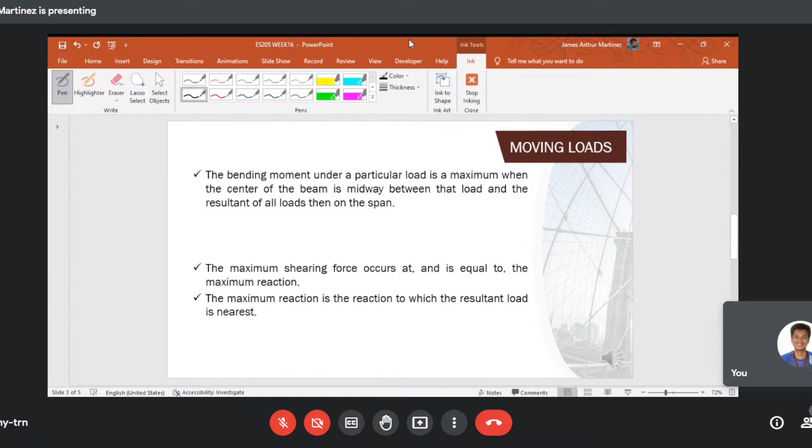Ayun. Hala, hindi ko sure. Okay, very good. So, by the way, class,

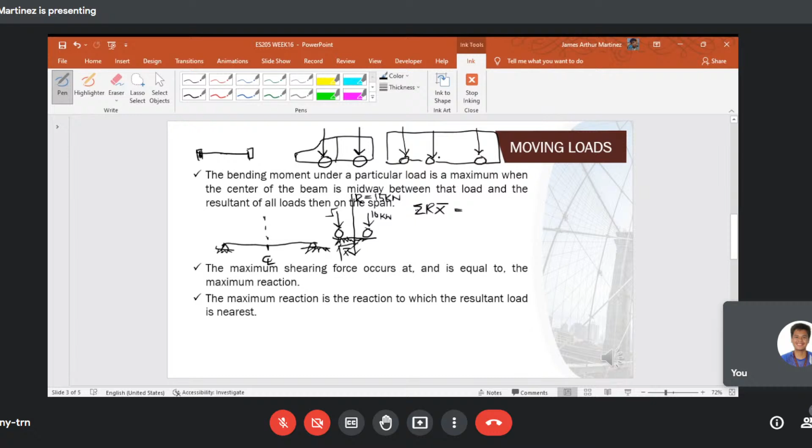So, pag-locate mo sa imuhang resultant force, so we are to apply the Varignon's theorem, di ba? So, from statics. So, ang atong baseline ani is si 5 kilonewton na force. So, what will happen is, di ba, you have the summation of resultant force x bar is equal to the summation of its components na dayon. Let's say P1 x1 plus P2 x2 etc.

So if i-apply nato na siya dinhi, so resultant force nato which is 15 kilonewton x bar is equal to, so kung ang 5 kilonewton ang base, so moment arm or the distance lang niya ana is 0. So, the 10 kilonewton, you have 10 times the distance, L. Let's say this is length L na distance. So, 10L. Therefore, ang location sa imuhang resultant force is 10L over 15, or that is 2/3 of L, 2/3 of the distance of your concentrated loads, 5 kilonewton and 10 kilonewton.

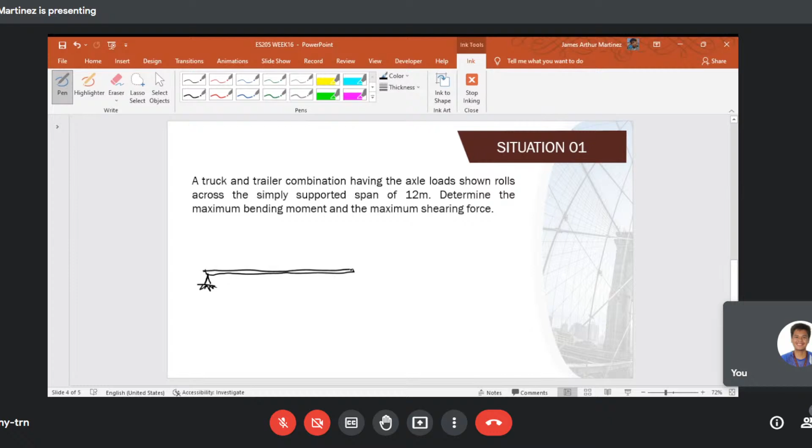So we have here a truck and a trailer combination. Sige, wait lang ha, wala kay ruler. Okay, so let's say muning span sa to and it is katong beam, no, and it is simply supported. So span niya is 12 meters, no? Sige, so ilocate na to yung center line. Let's say naa ta'y part or naa ta'y point. And then naa ta'y mga truck o trailer nga combination. Wala ko i-state, actually naa tay figure ani class, and I forgot to include it here. But ako na lang i-draw ang figure.

So ato ang moving loads, kay naa siya. So we have here natay tulo ka axle, no, so these are axles, class, represented by wheels lang, and naa silay magnitude of 15 kilonewton, 25 kilonewton, and 50 kilonewton.

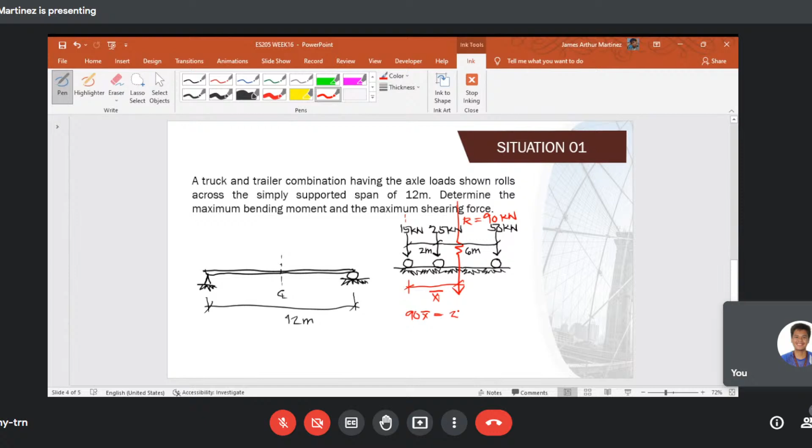So kung ato ang baseline or ato ang analysis is ato i-consider na point si 15 kilonewton na force, so you have 25 times 2 plus the 50, no, 50 kilonewton times moment arm is 6 plus 2, so 8. So x bar therefore is pila ba ni siya? This is 5 meters, no?

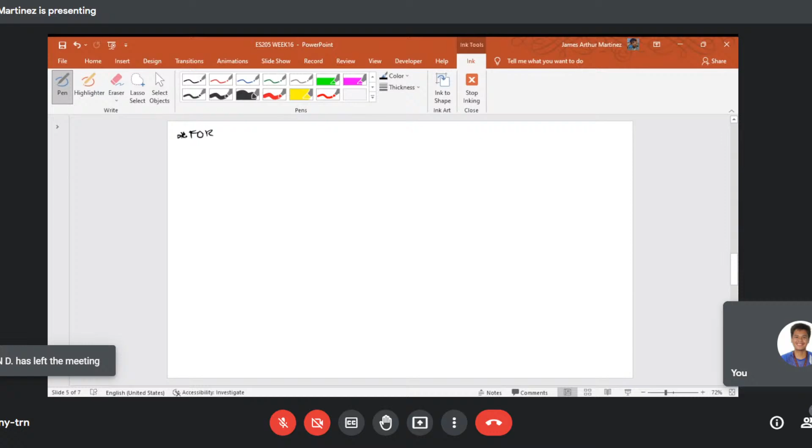Sige, so for... so we are finding for, or we are determining the maximum bending moment pa, class, no? Later ang shear force na pod. So for 25 kilonewton na load, sige, sa itong buhaton, di makapy ba ni, para di na ako magsige drawing ng beam.

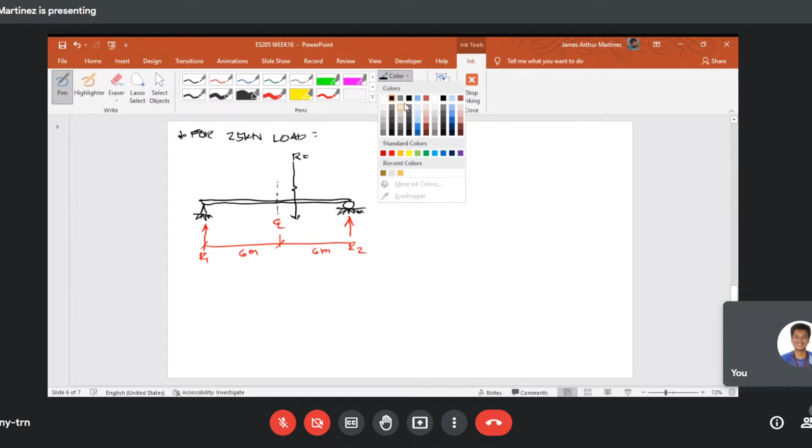So you have here the resultant force, CR, which is equal to, pila na siya? 1.5, no? And then C, 25 kilonewton. This is also 1.5 meters. Okay. Sige, so location sa to ang 15 kilonewton is 2 meters from 25 kilonewtons man daw siya, no? And this is 6 meters.

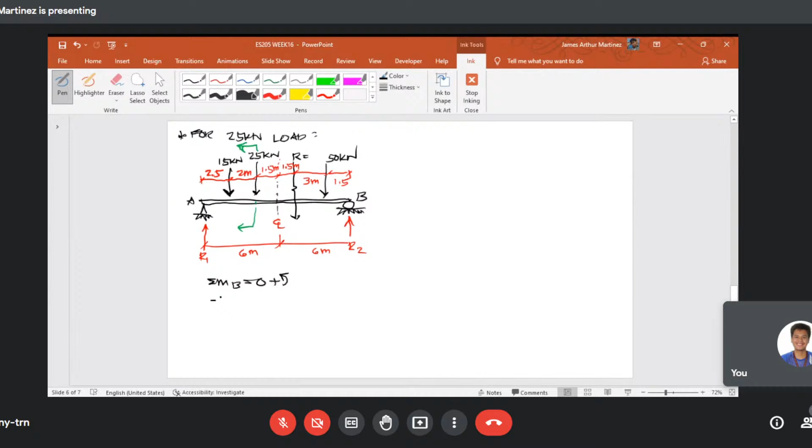So by summing up moment at point B, makuha na to ang reaction kang point A. So summation of moment at point B equal to 0, having counterclockwise as positive. So you have, the same lang no, negative R1 times moment arm is 12. Then, okay, so si resultant force na ang ako i-consider lang yapon diri no. So that is positive sign convention no, 90, since the resultant force here is 90 kilonewton as well.

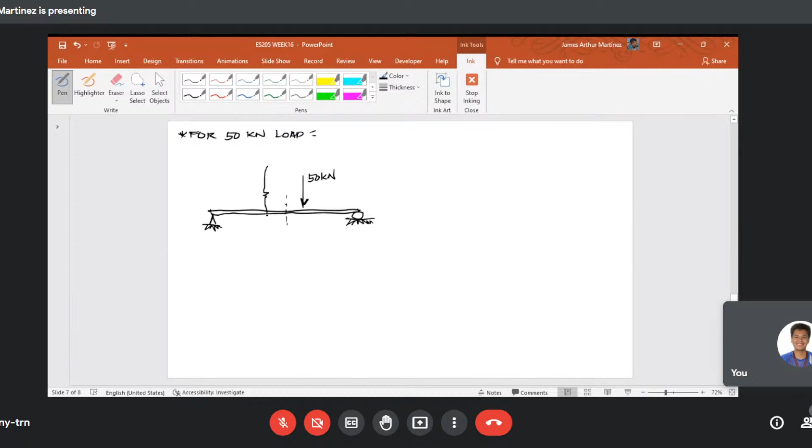So for 50 kilonewton load, patungaan nato ang center line sa ato ang bridge, ato ang simply supported nga bridge. Sige, so 50 kilonewton and 90 kilonewton, or ato ang resultant force, that is 3 meters. So meaning tag 1.5. So if this is the 50 kilonewton na force and the resultant force, so 1.5 and 1.5, no?

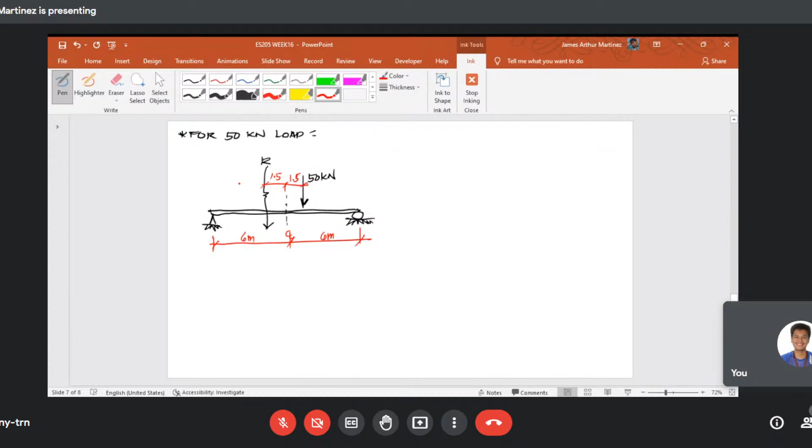And then 6 meters ang half sa ang span. So from the resultant force, padulong kang 25 kilonewton is 3 meters man daw siya. So if this is 6, minus 1.5, minus 3 meters, so 1.5 na lang ang nabilin. This is 3 meters man. So from the center line, 1.5 plus 3 meters, 4.5 already. So 1.5 meters na lang ang nabilin. And take note that this is the 25 kilonewton na force.

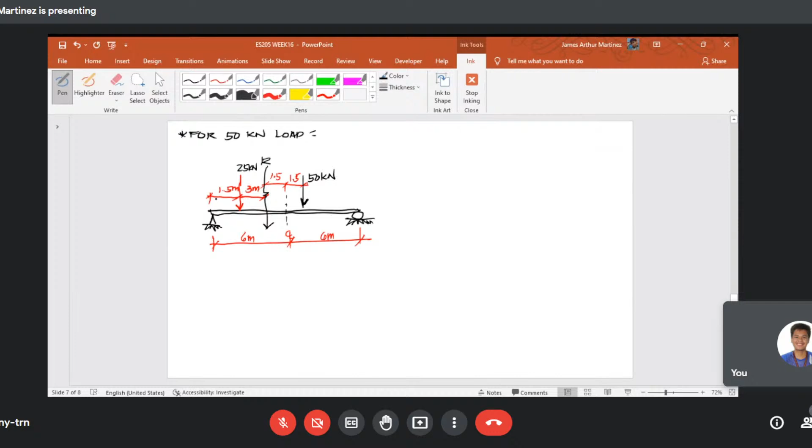And si 15 kilonewton is 2 meters away from 25 kilonewton na force, meaning, if the remaining span na lang sa atong bridge is 1.5, naa na sa gawas ang ato ang 15 kilonewton na wheel. So wala na siya na-include sa beam. So, if that happens, ma-relocate ang ato ang resultant force, and also ang iyahang magnitude is ma-change, since dili naman siya included sa analysis.

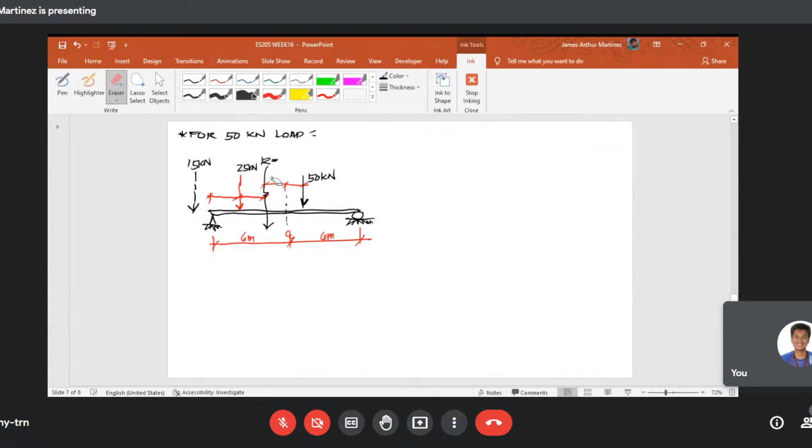So, what will happen here is, ilisan ko na lang, para di ako mag-draw again. So, the resultant force now would equal to summation of all the forces na included sa analysis. So, that is 75 kilonewton. It's only 25 plus 50 kilonewton. So let us determine the location of your resultant force. Let's say you have another x1 bar. How do we compute for x1 bar? You have 75 kilonewton times x1 bar equal to

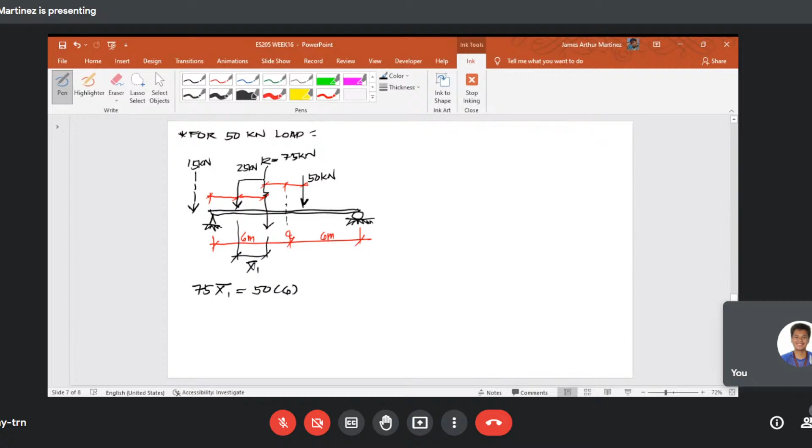distance ni 25 padulong kang 50, 6 meters, no? So this is 50 times 6. So x1 bar is 4 meters, which means that from 25 padulong kang the resultant is 4 meters. So resultant padulong kang 50 kilonewton, 2 meters na lang siya, kay 6 meters man ang total from 25 to 50, dayon 4 meters si 25 padulong kang R. So 2 meters na lang siya.

And ato man siyang patungaan, or i-align sa center line sa span. So that becomes tag 1 meter. So from the center line of our bridge, 1 meter plus 4 meters, 5 meters na. So ang remaining span na lang is 1 meter. And from 25 kilonewton padulong kang 15 kilonewton is 2 meters, so naa siya sa gawas. I-broken line na lang siya para dili mo maglibog. So from the center line 1 meter lang, so this is 5 meters lang.

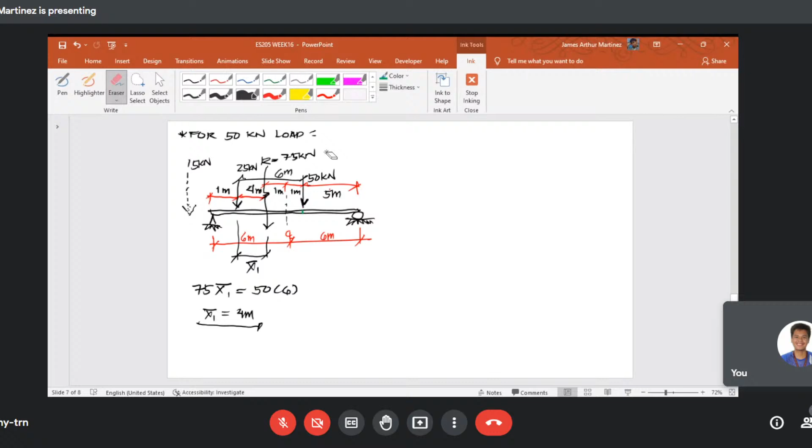Okay, so the same lang gihapon. Mag-cut lang dayon ta og section. Since si 50 kilonewton man ang atong gina-analyze, at 50 kilonewton ta nga point mag-cut. This time, pwede ta mag-analyze sa right side, pwede sa left side. For the sake of this problem, left side lang gihapon akong i-analyze. So if ang left side atong i-analyze, you have here the free body diagram.

So if ang left side, ang orientation sa internal shear and moment is like this. So you have the R1. Wala pa nato na-compute ang R1 and R2. And since I am considering the left side nga analysis, si R1 lang akong i-compute. So makita sa left side sa beam, you have the 25 kilonewton.

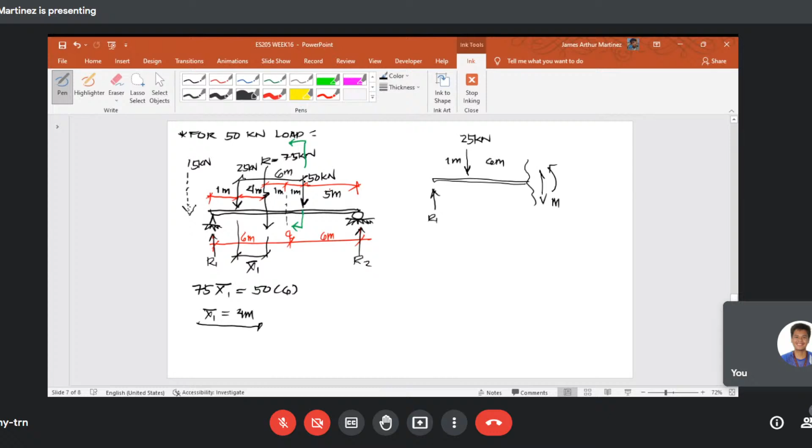Okay, and then distances is, this is 1 meter and then 6 meters. No? Kaya at 50 kilonewton man ta nag-cut-off plane. So at this point. So 25 kilonewton is 6 meters, padulong sa point na 50 kilonewton na loading. Okay? So, computed na to ang reaction 1 na si R1. So, this is point B and point A.

So, summation of moment at point B equal to 0 having counterclockwise as positive. Sige, so negative R1 times 12. So, the resultant force lang dayon ang gamiton class. So, plus the resultant force na 75 kilonewton, ang moment arm padulong sa point B is 7, no? So, this is times 7. So, 1 plus 1 plus 5 is 7 meters, equal na to 0.

Therefore, R1 is, pila man siya? 43.75 kilonewtons. Okay. Sige, naa na ta R1. So, makompute na nato ang internal bending moment, no? So, summation of moment equal to 0, having counterclockwise as positive. You have here R1. So, negative sign convention, no?

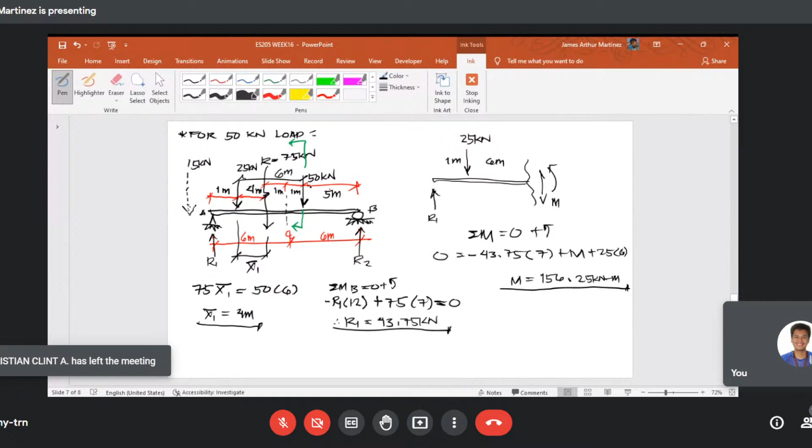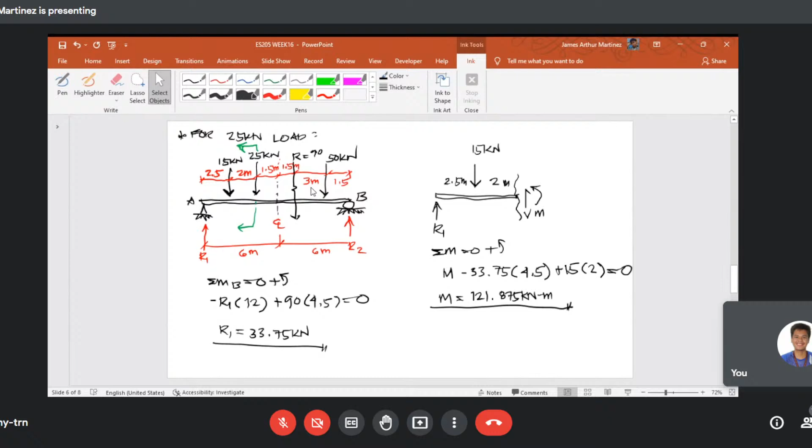So, if ato siyang i-compare, we have here for under 25 kilonewton na load, the maximum moment is 121.875 kilonewton meters. And then under 15 kilonewton na load, the maximum moment is only 91.875 kilonewton meters. So definitely, the maximum moment occurs under 50 kilonewton na load class, which is 156.25 kilonewton meter.

Okay? So, sige, let's try to analyze ang right side class. Mas dali kung right side kay si R2 na ang makita. So, since na-solve na nato ang R1, pila man ang R2? So, summation of forces on y-axis lang dayon ta. So, resultant force minus R1 na 43.75, you have R2 or the reaction of your support at point B is 31.25.

And then times, at point sa 50 kilonewton nga load na cut, so 5 meters, di ba iyahang moment arm? So R2 times 5 or 31.25 times 5, you also have 156.25 kilonewton meter. So, the same lang siya, regardless asa ka mag-analyze, either left or right. So, akong advice or akong tip is, of course, consider the least forces involved para dili kayo maglibog sa inyong analysis. So, technique lang na class.

So for the shearing force class, unsa lang siya? I-label na lang nako ha. So, sige. So, atong i-state ang general rule sa moving loads. So, the maximum shearing force occurs and is equal to the maximum reaction. So, ang reaction, mao na ang maximum shearing. Then, the maximum reaction is the reaction to which the resultant load is nearest. So, sige, ato na siyang i-demonstrate. Unsay pasabot ani, no?

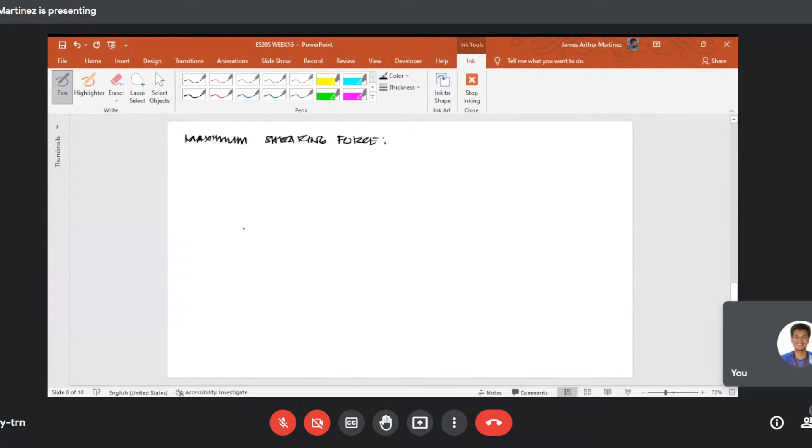So, if we have this beam, atong buhaton class is ibutang lang ang load sa supports. So excuse me, unsa atong unahon og analyze class, no? So if this is the 50 kilonewton na load, then let's say R1 and R2 here. So, ang 50 kilonewton, wait lang, kopyahon ko daw ni para.

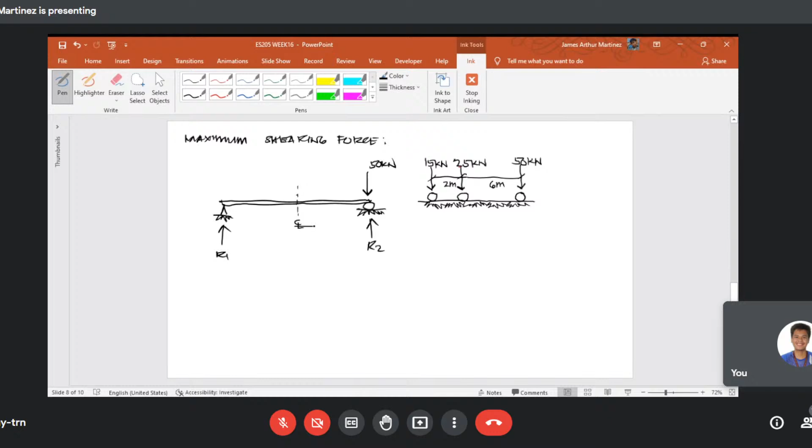So, the 50 kilonewton, 6 meters to the left, naadig to si 25 kilonewton. And take note that the center line of our span is only 6 meters pod. So, naagil rin, no? Exactly. Si 25 kilonewton. And then 2 meters lang dayon si 15 kilonewtons. Okay. So, let's say this is A and B.

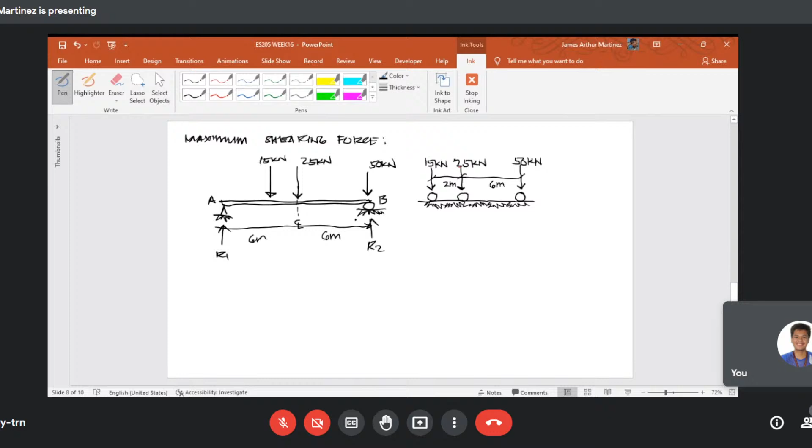So, of course, kung ang maximum reaction ana is nag-occur kang R2, kaya siya man ang pinakanabugatan og ayo ani nga case. Kaya naman nag-act sa iya yun exactly ang moving load. So, atong i-compute is si R2. So, summation of moment at point A equal to 0, having counterclockwise as positive. So, R2 will be positive, times 12. Okay, so gamiton lang ako ang resultant force kay mas dali siya.

So the resultant force here is, di ba, 90 kilonewton. And ito yung location. Di ba, 2 meters ni siya. This is 3 meters and also 3 meters. So meaning the remaining span sa ang beam from the center line is 4 meters, class. So this will create a negative sign convention. So negative 90 times moment arm 3 plus 2 plus 4 is 9, equal to 0. So R2 therefore is equal to 67.5 kilonewton.

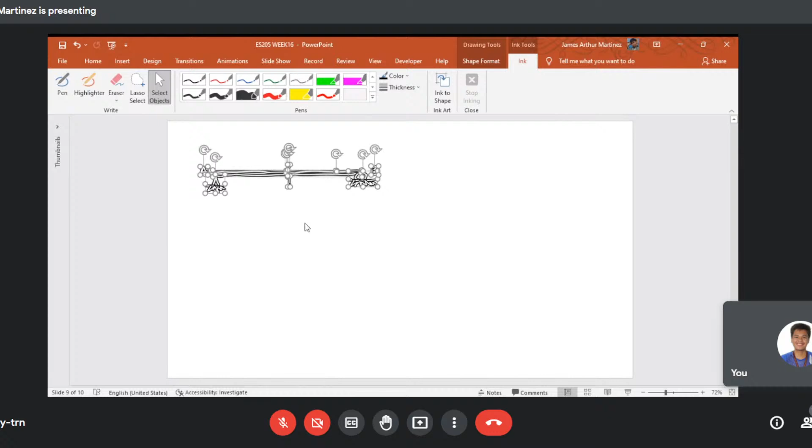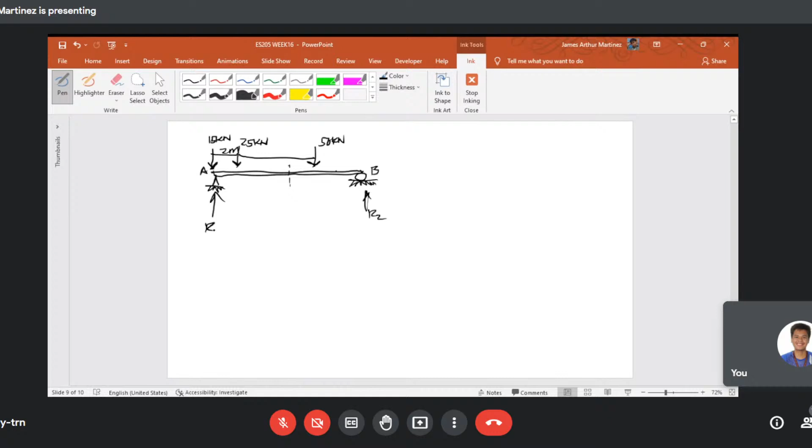Sige, next page na lang nato para separate ang mga analysis. So, how about if si 15 kilonewton is naa siya sa point A. This is 15 kilonewton and then 2 meters away from that is si 25 kilonewton. And then 6 meters away, narito si 50 kilonewton. So, R2 and R1. From center line, tag 6 meters lang sila. Since that is 2 meters, 4 meters na lang dira and 2 meters diri nga part.

But the resultant force, asa man siya nag-act? Diri siya nga part siguro. So, resultant force is 90 kilonewton gihapon and iyang distance is 3 meters and also 3 meters. So, pila may nabilin na span? If this is 2 meters and 3 meters here, so meaning 1 meter ni siya diri, class, kani siya nga part.

Wait, dili ko maglibog. Ang 3 meters is from the resultant padulong kang 50 kilonewton. And kani siya is only 1 meter. Kay you have 2 meters and 3 meters. From 15 to 25 kilonewton, 2 meters. And from 25 kilonewton padulong kang resultant force, 3 meters. So 5 meters na siya. And the half of the span is 6 meters, so at center line padulong kang resultant force, 1 meter na lang. So, 1 plus 2 plus 3 is 6 meters.

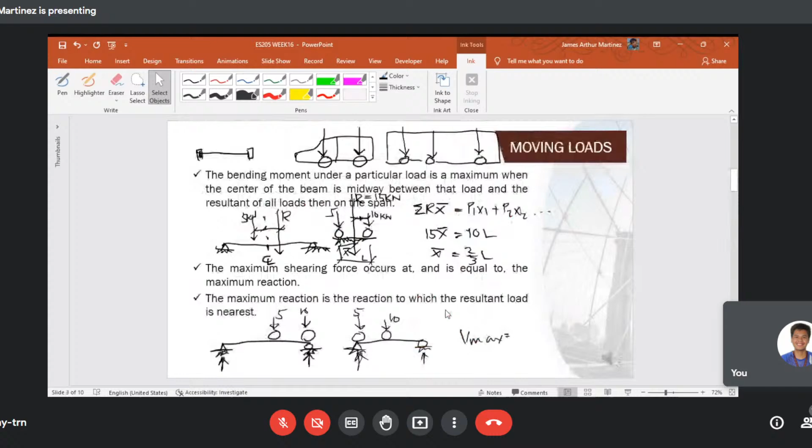Okay? So if i-compare na to ni sila class, the maximum shearing force would be the maximum reaction pod. Diba? Kaya niingon man siya diri nga the maximum shearing force is equal to the maximum reaction. So, kinsa man nato ang maximum reaction? So, R1 and R2 here is 22.5 and 67.5. Then, if ang 15 kilonewton ato siyang ibutang sa left support, R1 and R2 would be equal to 52.5 and 37.5 kilonewtons respectively.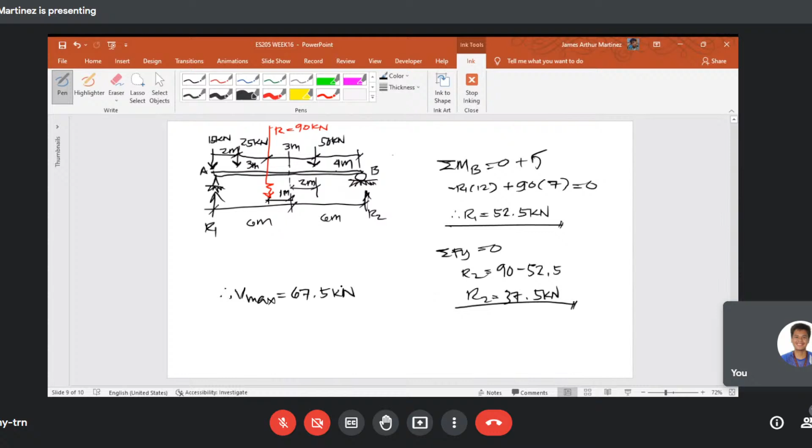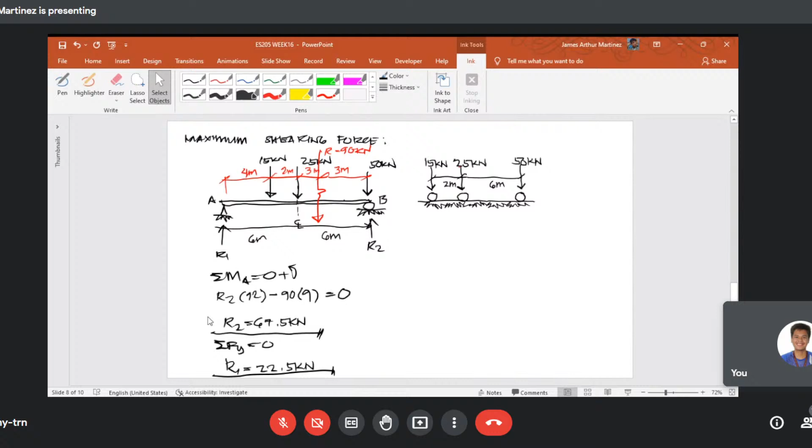So definitely, si 67.5 kilonewton ang ato ang maximum shear class. Therefore, Vmax is equal to 67.5 kilonewtons. So, nag-occur ang maximum shearing force under 50 kilonewton na loading, if ato siyang ibutang sa right support or point B. So, therefore, the maximum bending moment is equal to 156.25 kilonewton meter and the maximum shearing force is equal to 67.5 kilonewtons. Mao ni nga magnitude ang ato gamiton sa design.

So, any question, class, or clarification? Nasabtan ninyo class, ang moving load nga topic? Yes, sir. So, happy birthday, Jeremiah. Birthday din ni Miss Bainos today, so happy birthday, Miss Bainos. Thank you, sir. Invited daw ka, sir. Sana all.

So, anyway, next week class, naa tay quiz. So, I just hope na nasabtan ang moving load since mobalik na siya sa inyong higher years sa structural design. Always remember the method in computing for the maximum bending moment as well as the maximum shearing force. Patungaan lang nimo ang resultant force and ang loading na imong gina-analyze, i-align nimo sa center sa imong beam if you are computing for the maximum bending moment. If shearing, ibutang lang ang imong loadings or wheels at supports, left and right, para ma-verify nimo.

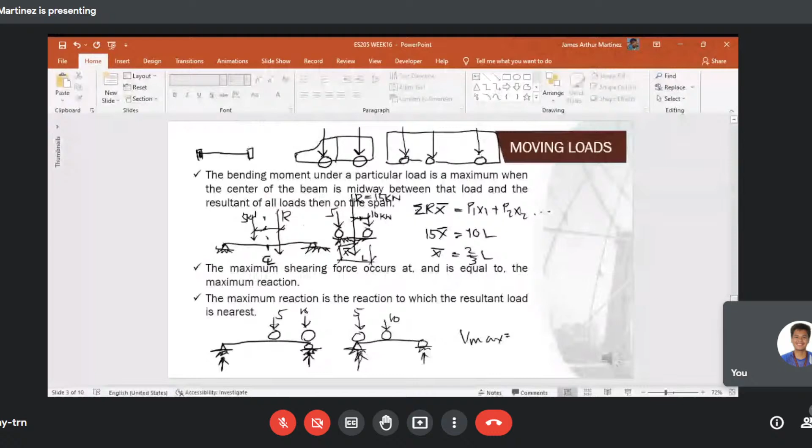Okay. So wait lang. Nalimot ko og emphasize ani: the maximum reaction is the reaction to which the resultant load is nearest. So, if you notice class, sa ato ang moving load, ang resultant, asa man siya? From the 15 kilonewton load, 5 meters away man siya. And from the 50 kilonewton, the location of your resultant force is only 3 meters. So mas duol si resultant force sa 50 kilonewton na force.

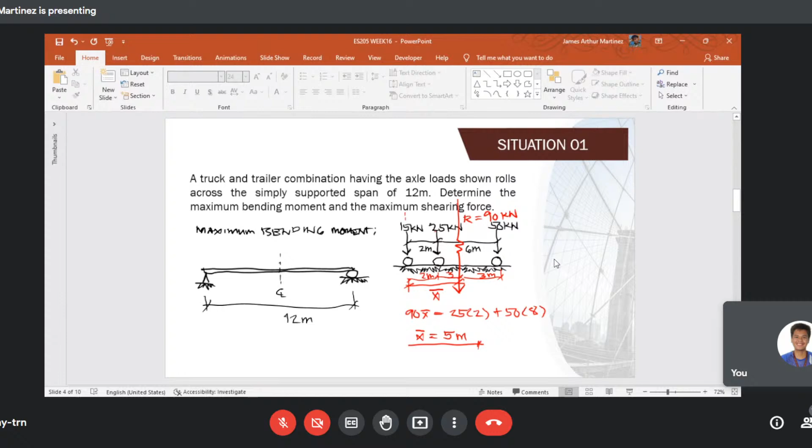So unsa may pasabot ana? If ibutang nato si 50 kilonewton na force sa support, didto nato makita ang maximum reaction. Which is true. Si R2, in this case, ang maximum shearing force, 67.5 kilonewtons, since mas duol si resultant force sa reaction B compared if si 15 kilonewton ibutang nato sa support A. Si resultant force from point A is 2 plus 3, 5 meters, unlike sa support B na 3 meters.